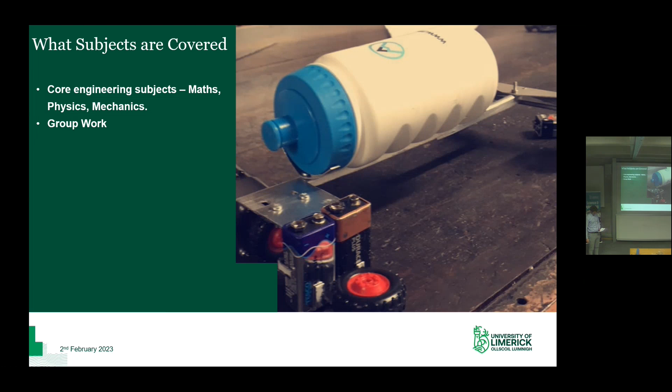What else do you do? You make a little car like this that will carry a bottle of water up an incline, so that's a good group project as well. There's even awards sponsored by outside companies like Modular Automation, so it's great industry exposure. From very early on in college, you do presentation work and stuff as well.

So in 2nd year then you'll move on and do more study on aerodynamics and on flight. There's wind tunnel work and group design projects, and you use software like XFLR5 and SolidWorks for CFD and for CAD.

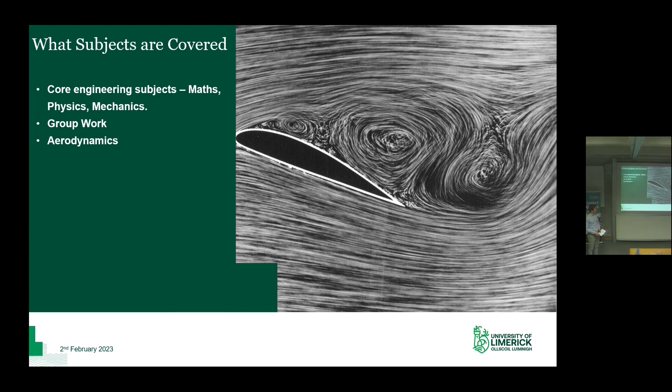After that, at the end of 2nd year and through 3rd year, you'll be doing your placement. That lasts from May to January, around those times anyway. I did my placement in Airbus in Hamburg - it's a really valuable part of the course. I worked in the cabin compartment ventilation team and was on testing for the A320neo and the A321XLR.

It's great exposure to the workplace, great to get involved in an office and know what it's like after graduation. I got to do work on test rigs, run data analysis, make presentations to the office, and participate in ground tests for new planes. And every day outside the window, you're watching interesting planes and demonstrators and early MSNs doing test flights. So it's really great to get the experience.

I also did 2 weeks with the A380 delivery center where they were testing new planes and debugging them. They were doing flight testing, and then they bring the planes back, and we got to run around and check all the little faults and errors that they were getting to make sure the plane was ready for the customer.

So other than that, for the remainder of the course, you'll be doing more studies in aeronautical engineering. You'll do CFD, CAD, FEA, flight mechanics, and composites.

There's some great opportunities - you get to do the Cranfield Flight Lab, so they'll take you up in this plane. You'll be doing stalls, and then you'll analyze the test data afterwards. You'll do lots of different maneuvers that you'll have studied during your course, and you'll basically be able to see them in real life and feel how it feels in an actual airplane. You also get to do the flight simulator that the college has installed there, so they're great experiences really.

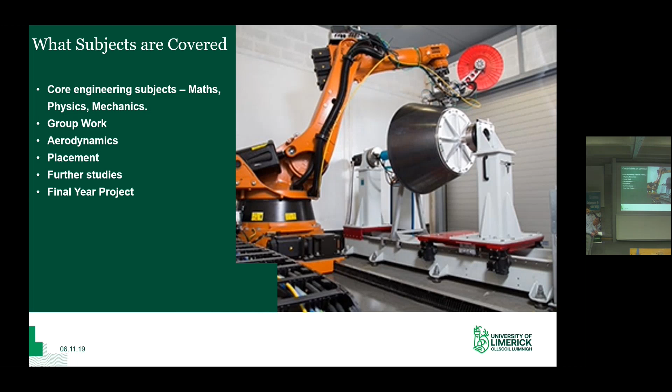My project was to test a small scale prototype of a collapsible mandrel for use with the type of industrial robot that you see here. The university has two of these installed, and engineering students have some access to them as well. The idea was to help with the development of offshore wind turbines. This is basically how my project turned out, and it was a good success thanks to everything I studied in college.

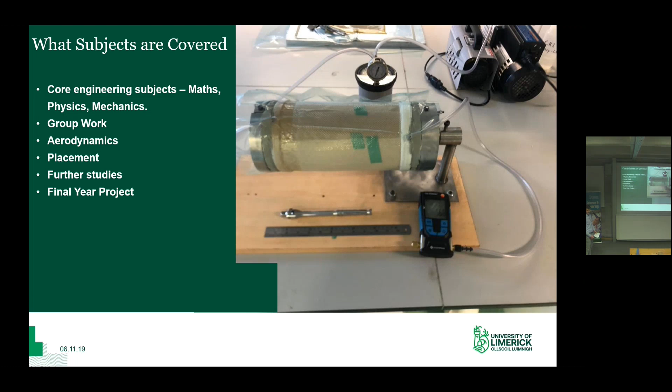Having finished studying in UL in May, I felt I was ready to go into industry. So I took a job and started in June with Shannon Engine Support. I'm working there as the model leader for the CFM56-5B engine, which powers the A320ceo. We're the world's largest lessor of CFM engines, and I'm the model leader for this particular type.

So I manage nearly 100 engines, and they get sent to airlines around the world to help with maintenance issues and to support their expansion and other programs. I make sure all the paperwork and documentation is right with the engines and that they're in good condition for the next operator. I like the job as well - I get to travel a little bit, and I get to meet with operators and help them with their issues.

So other options after graduation - you can go into any companies. You're very employable having done an aeronautical engineering degree, across all disciplines of engineering. But UL's course is particularly valuable if you want to enter industry immediately after.

Other options are to do further study - there are great PhD opportunities offered within the university and elsewhere. The third option is to do a graduate program, where you work for a company while they give you training, moving around to different departments within the company. They give you training for a year or two, and after that you finish your graduate program with an extra qualification.

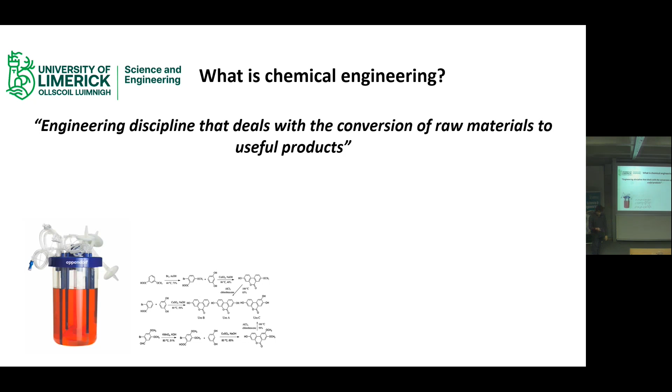The problem is you only usually get a gram or two, a very small amount. So to get to a point where you can actually get this product onto the market where people can use it and it can have a positive effect, you scale it up. That concept of going from lab scale bench studies all the way to industry, translating each individual reaction step into unit operations like reactors and distillation columns to make the product in very large quantities, is core to what it is to be a chemical engineer.

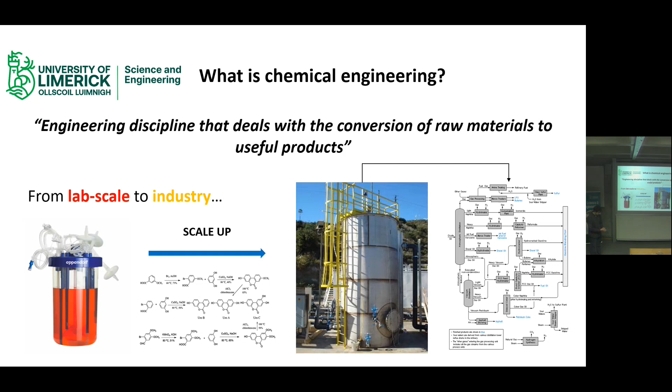Just a very brief overview of the modules that form part of this course. Like most engineering modules, you have mathematics and a basic grounding in the natural sciences: physics, chemistry, biology. You also have additional, more specialized modules in chemistry, and in what we call process engineering.

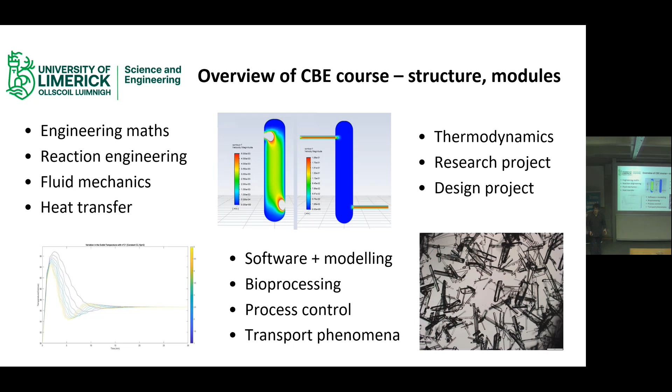This brings me to two unique features of LM115: we actually have two capstone projects. The first, covered in the first semester, is to do with research. I did mine on the synthesis and characterization of multi-component drug-drug co-crystals, essentially finding a way to get two different drug molecules into the same crystalline phase, potentially for use in combination therapy. From that, I got really good hands-on research experience, which is one avenue you can take after graduation - going into academia and towards a PhD.

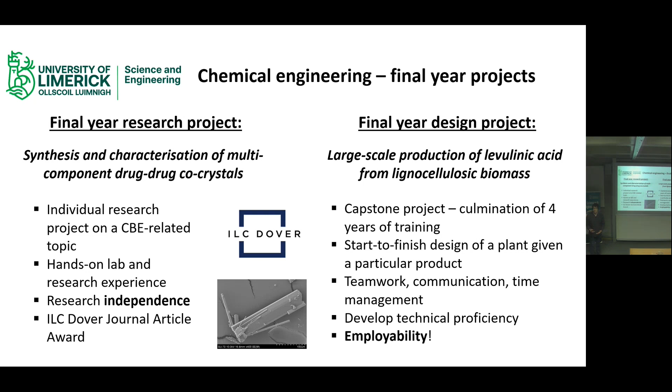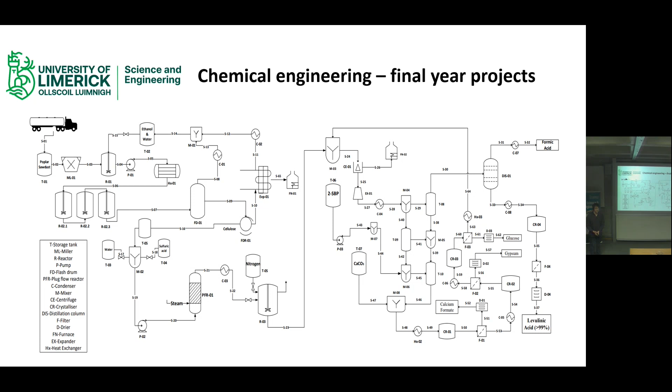One thing to say is that I wasn't set on chemical engineering from the get-go. My first choice was actually theoretical physics - I think I watched a little too much Big Bang Theory. But in sixth year, there were a lot of stories in the news about chemical engineering, specifically the pharmaceutical industry and the big discoveries being made about new medicines and molecules. That's what made me start looking for courses like this - that combination of application, but then looking at the curriculum and seeing modules in physics, chemistry, and engineering mathematics, which were the subjects I most enjoyed in secondary school. That's why I decided to go with this course.

Just a very quick overview of what I'm doing now. I mentioned biological engineering - the application of engineering principles to solving problems at the interface of medicine and biology, having to do with genetic engineering, protein engineering, synthetic biology, and biomedicine. What you find is that bioengineering is very rooted in chemical engineering - 90% of people at bioengineering conferences are themselves chemical engineers. But this is an emerging field, and as you've probably heard from the news with the mRNA vaccines, it's a very new area that's going to be of growing importance in years to come.

And just to finish up, if I've bored you all to tears, this is the one point I want you to take away: you are not bound by the title of your degree. I know a lot of people worry that they're going to make the wrong choice, go into the wrong course, and be tied into that course for 4 years. But the skill set you develop over the course of an engineering degree is broadly transferable.

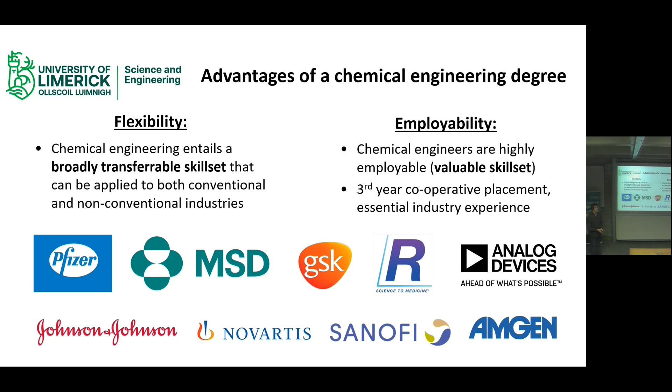So I know people who have finished this course and gone into places like Pfizer and Regeneron. I know people who've leaned into the teamwork and communication skills they developed with the design project to go into consultancy or management. And I know some who've gone into other engineering fields, shifting to electrical or mechanical engineering, because you're still using the same mathematics and scientific basis, just applying it in a different way.

That's it for me. Thank you all for listening.

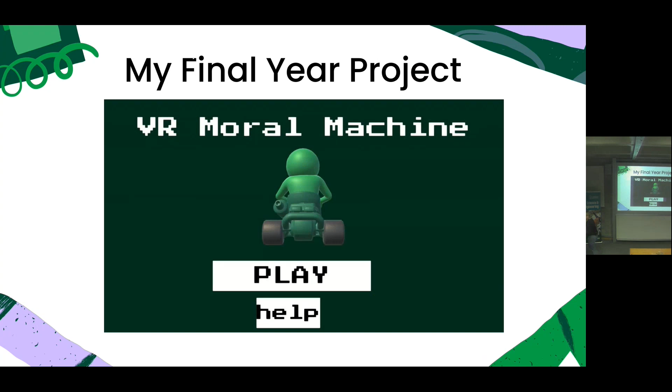So this is like a little snippet of the game. I made a VR version of the trolley problem. You're given two options, one option is to kill three men and one option is to kill one man. Horrible, obviously, but it's supposed to see how different people react if they were doing a VR version of the trolley problem rather than just talking about it theoretically.

So I got hired as a research assistant and Unity developer with the CONFIRM Smart Manufacturing crowd. They work as a research centre in UL, just outside UL where the Travel Lodge is. And I made a VR version of their building.

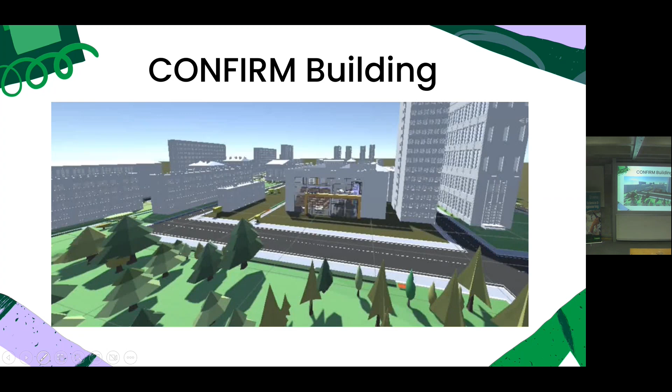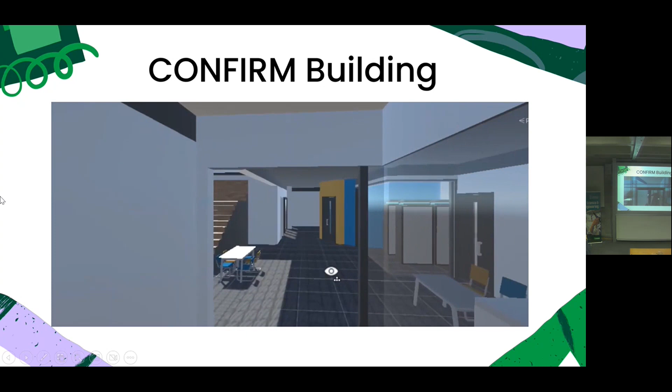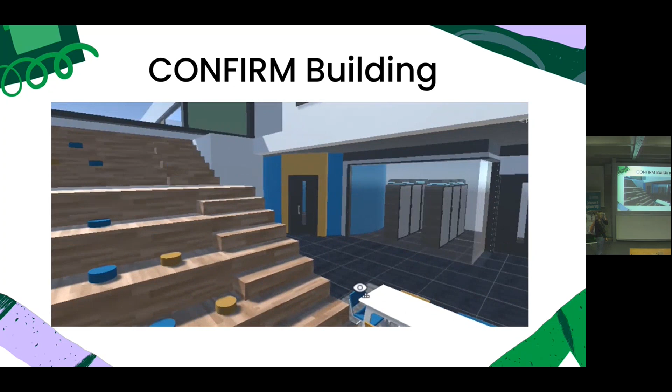This was supposed to be way quicker, but let's just walk through it. I worked on this for the last couple of months and it's still not 100% finished. I'm adding stuff to it, like the roof and lights and stuff.

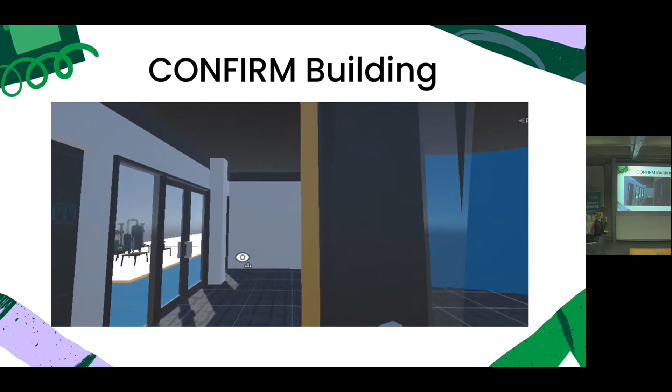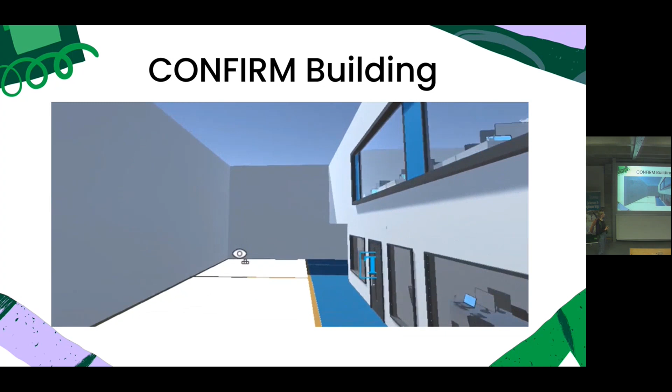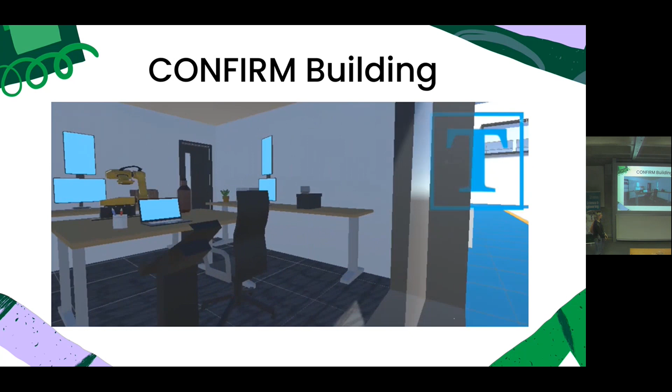But I entered this project into a VR competition in France, the Laval Virtual project. I think I'll find out next week if I go into the final, but they look for projects like this that use VR in industry and manufacturing, that kind of thing, and showcase it at a conference in France. So it's really fun.

Other projects I've been working on - I'm currently trying to get a job for my J1. I'm going on a J1 in San Francisco starting in August, trying to get a job in VR and games development in that area.

I had a meeting at like 7, and they were like, 'Oh, we should think about what project you should do.' I had this idea and I was like, 'Okay, I have to do it right now.' So I was up until like 5am making this. I still have to kind of make it look nicer.

But yeah, stuff like this is kind of fun, I can just make a house now. And at the start of my uni development... journey, that's the word - sorry, my uni journey, this would have taken me like weeks to do, so it was kind of nice that I could do it in a couple of hours.